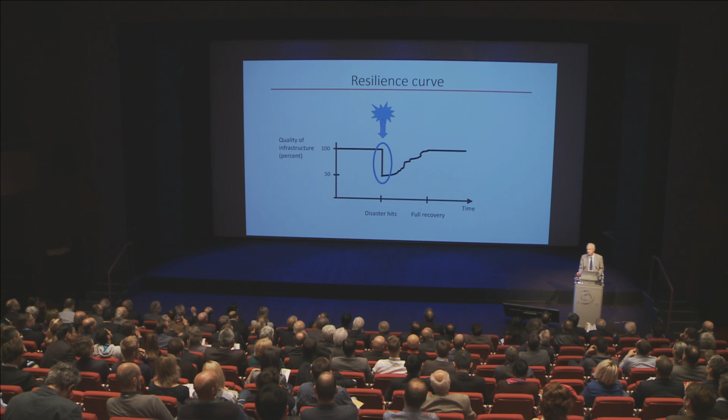If the structures are not resistant, the drop is very large and the recovery is very costly and takes a very long time. An extreme example is Haiti. As you know, there was an earthquake in 2010 with catastrophic consequences. The magnitude was not so large, it was only 7.

But the consequences—death, wounded, homeless—were catastrophic. The problem is this was the most destructive earthquake that any country has experienced in terms of the number of fatalities relative to its population. The reason for this was inadequate construction practice due to poverty, lack of professionals in the construction industry, and no seismic code.

Another example, on the other end, is a developed country, Chile. In the same year, the magnitude was much stronger. Magnitude is a logarithmic scale, and this earthquake was almost 1,000 times as strong regarding energy. In spite of this energy, the number of deaths was relatively low compared to the magnitude, but the damage was still extensive. Here we experienced very good behavior of engineered structures.

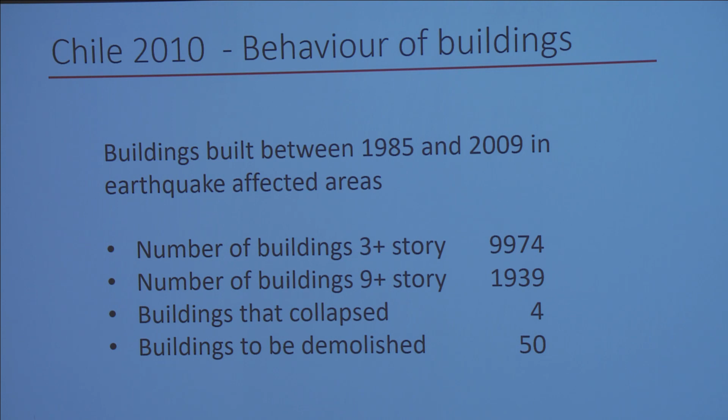Some data from taller buildings built in the last 20 years before the earthquake: only 4 buildings collapsed and 50 were to be demolished. This experience can be followed also after other earthquakes.

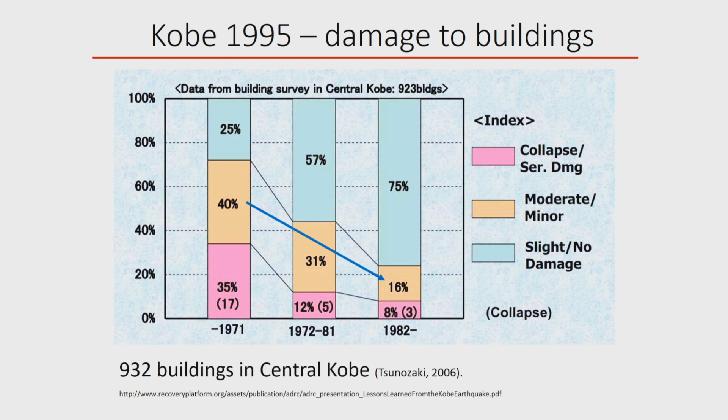The same trend can be observed after the Kobe earthquake. Again, damage to buildings was decreasing with increasing year of construction. This period of construction corresponds to different Japanese codes. So what we can see is that modern seismic codes are able to prevent, more or less, collapses of buildings.

One example from the Chile earthquake: in the most hit area, the city of Concepcion, we found a parking garage without a single crack. But unfortunately, in the same city, there was one of these 4 buildings which completely collapsed due to some problems in design.

This is the building Alto Rio before the earthquake. It was built just 2 years before the earthquake. It was an apartment building, and this is after the earthquake. Still, it's difficult to believe, but 79 people survived this collapse.

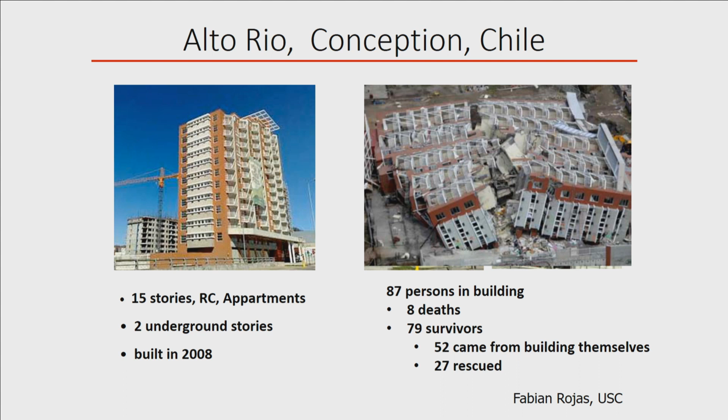So what we can say for new buildings is that modern codes provide seismic resistance if they are implemented in design and construction. So what is the potential problem? Review of design and control of construction. Earthquake-resistant design is not completely trivial, and some skills are necessary. Without review, things like what we showed before can happen.

I would like to emphasize something not very well known to the general public: that the seismic code is mainly about saving lives, not buildings. For example, the aims of the European standard for earthquake-resistant structures, Eurocode 8, has 3 aims: human lives are protected, damage is limited, and structures important for civil protection remain operational. Please note, damage is limited, not damage is prevented. This is because of economic reasons.

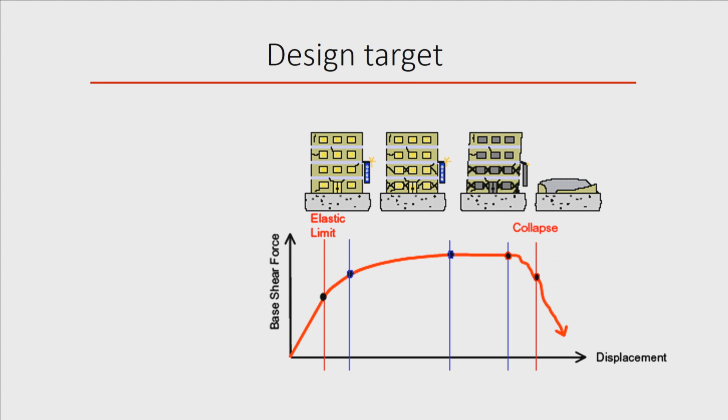I will try to explain this by showing a load-deformation diagram. In a usual situation, with vertical loads and small wind load, we are in this region, the elastic region, meaning no damage. But in the case of an earthquake, we design for rare earthquakes with about a 500 year return period. The probability of this event is 10% in 50 years, so a relatively low probability. So how we design is for life safety, not for preventing damage, for economic reasons, because earthquake-resistant design costs something.

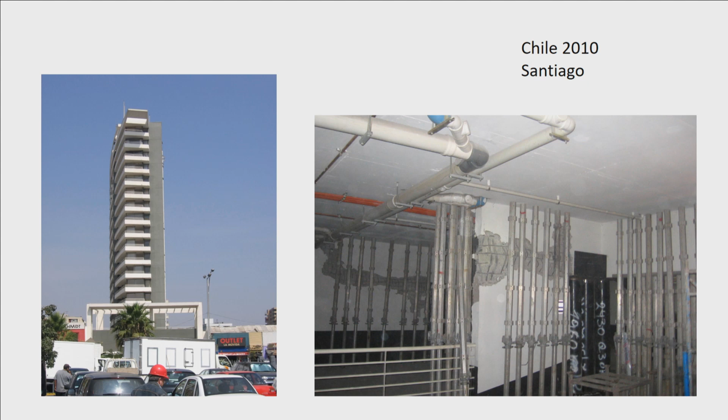To demonstrate this, I will show a building from Chile, from the same earthquake, in Santiago. From outside, it looks nice, but if we went to the basement, it was quite heavily damaged. The building was evacuated, and of course the owners and tenants were not very happy.

Because of this, there is a tendency in most developed countries, like New Zealand, which had a very bad experience with the Christchurch earthquakes some years ago, to decrease the damage, to change the design from life safety to less damage. But of course this costs money and will take time, and not many countries can afford this.

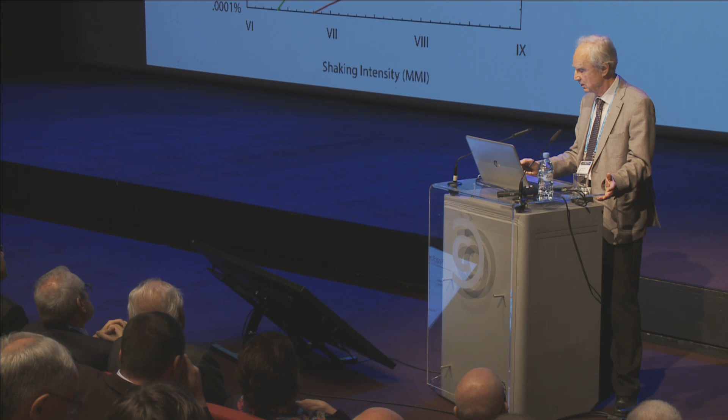A few words about Ljubljana, the city where we are today, my hometown. In Ljubljana, I would say a moderate earthquake, magnitude 6, was in 1895. Ljubljana is not a big city, and at that time was even much smaller. But 10% of buildings were destroyed and removed. At that time we lived in the Austro-Hungarian monarchy, and the next year a building order was issued which required some measures for unreinforced masonry buildings.

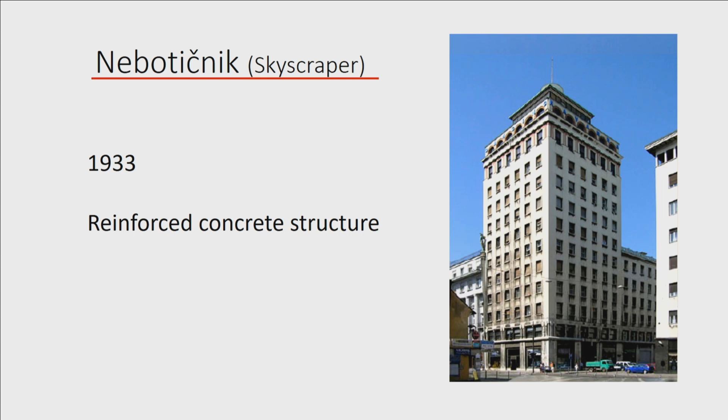People in Ljubljana still remember that earthquake, and when they built this building in the center of Ljubljana 40 years later, we called it Nebotičnik, which means skyscraper. At that time it was the tallest building in the whole region. It was a reinforced concrete structure, and they put a lot of emphasis on earthquake resistance, according to the knowledge available at the time. It's interesting that the designers used seismic isolation.

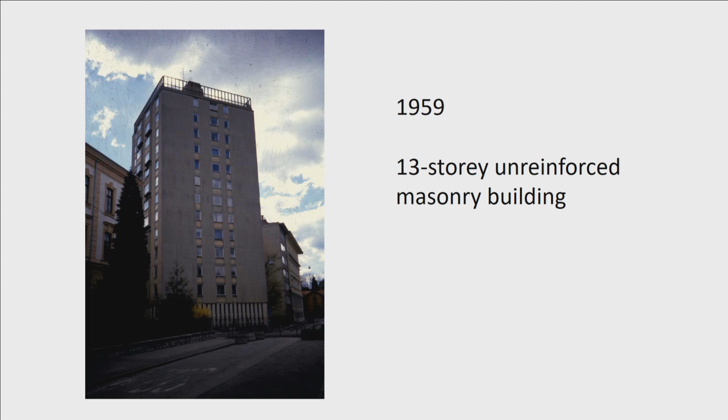But then, unfortunately, after the Second World War, there was a time of poor quality, quick construction, and no seismic codes. Some buildings like that were built in Ljubljana. This one was built in '59, a 13-story unreinforced masonry building. You can see, when the facade was removed, I took these pictures, this is unreinforced masonry. According to today's standard, it could be maybe 2 or 3 stories maximum, not 13.

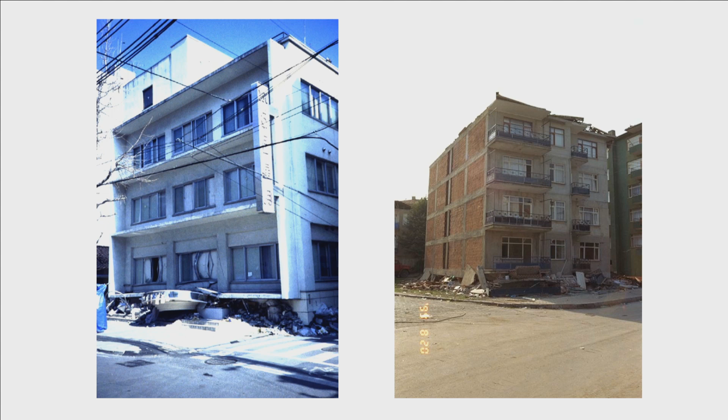Soft-story buildings are built because of architectural requirements. I put here only 2 of them, one in Japan and the other in Turkey, where the first story used to be. There are thousands of buildings like that. So this is enemy number 1.

Actually, this happened to be my building where I live. Very soon after this retrofit, a moderate earthquake happened in Slovenia, and journalists came, and we discussed different things. I mentioned that I retrofitted this building, and the next day there was an article in the daily newspaper: 'Potres bo, Fajfar hišo saniral,' meaning an earthquake will happen, Fajfar fixed the house. You know this joke: there will be a very cold winter, Indians are preparing firewood like crazy.

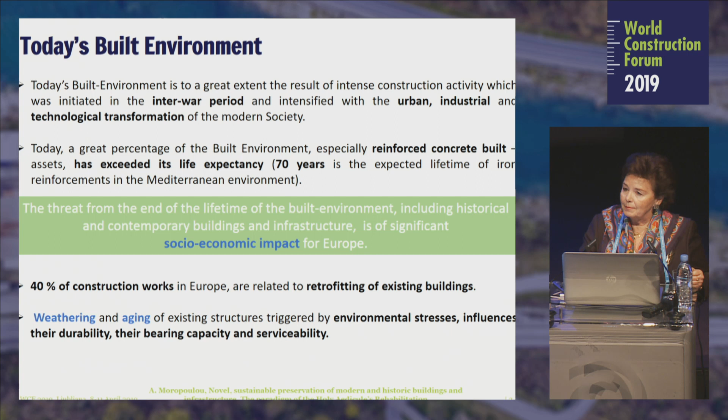At the National Technical University of Athens, we are dealing with the science and engineering of these efforts, and we know very well that research and innovation are the background on which we have to found this joint effort. In our case, our experience in monument preservation, concerning monument rehabilitation, I'm going to present the Holy Aedicule of the Tomb of Christ in Jerusalem. I might say that heritage is a lesson for all of us. Preserving heritage, we are talking with the monuments, and monuments are talking to us. And this is a lesson to learn concerning the preservation of our built environment and the resilience of our infrastructure.

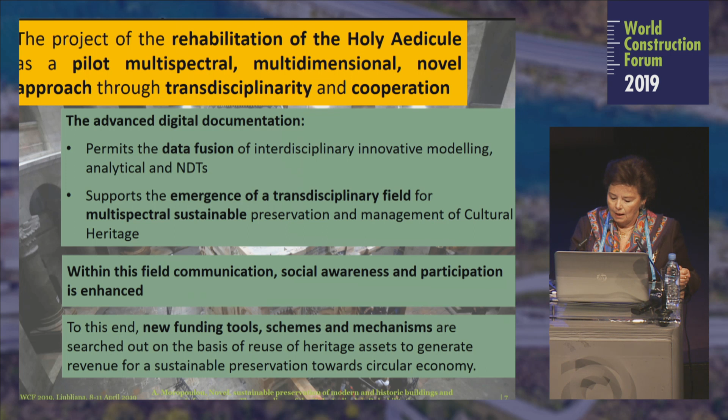As I've heard, and I was very pleased with this note from the UNESCO representative, it is a conscience of today that interdisciplinarity, merging capabilities and know-how, is the scientific basis in order to perform rehabilitation. Within this effort and the specific experience of the monument we dealt with, this unique monument is associated with communication, social awareness, and participation of humanity, which was enhanced and was necessary in this direction.

The Church of the Holy Sepulchre in Jerusalem is a church where the crucifixion and the resurrection places are brought together. The Holy Aedicule of the Tomb of Christ was a structure that from Constantine the Great passed through Byzantine,

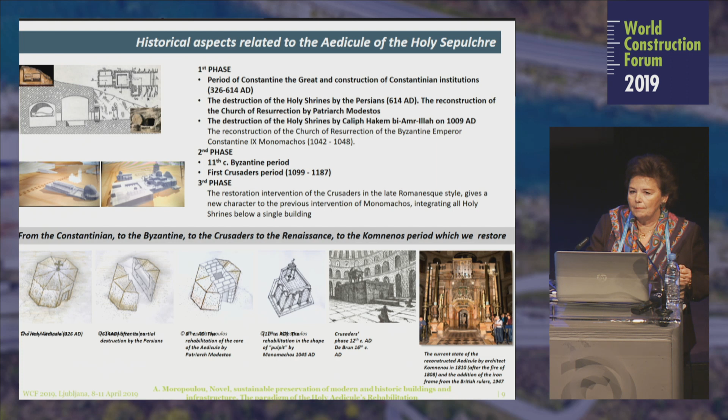the Crusaders period, the Renaissance period, and the last restoration before ours, the one of Komnenos at 1810, and the Ciborium, which is actually the specific structure to protect the Tomb of Christ, went from the octagonal structure to a columned structure, the Ciborium actually, to the mausoleum of the 19th century, the Baroque one, which we received absolutely deformed and sustained by the English mandate at 1947 with iron beams in the cage form you can preserve, and which we delivered one year later in the form you can see.

This project started with the invitation by the Greek Orthodox Patriarch Theophilos III, and this was the reason that on March 15 this venture started, because for security reasons to the pilgrimage, the Israeli authorities closed the Tomb of Christ to the people.

I had the honor to comprise an interdisciplinary working team: Professor Korres, School of Architecture; Georgopoulos, School of Surveying Engineering; Spyrakos and later Mouzakis from Civil Engineering; and me from Chemical Engineering, Material Science and Engineering for the protection of monuments, leading this team. The methodology of the research concerning documentation, diagnosis, and the proposals for the intervention were integrated concerning geometry, architecture, historic materials and structures, and of course, all this open to the dialogue with the three Christian communities.

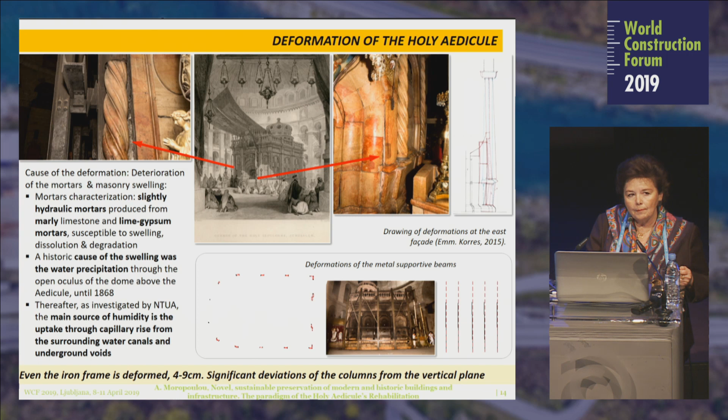The deformation of the Holy Aedicule was really a great problem, because they thought it was due to the rainfalls for decades after the Komnenos restoration from the open oculus of the dome of the rotunda of the Holy Sepulchre Church. As we later discovered, it was due to the rising damp from the underground area as well. But the deformation was clear, and the iron beams were not capable to negate it anymore.

Under these circumstances, and with the historical consent of the three Christian communities, the Greek Orthodox Patriarchate, the custody of the Franciscan Order of the Holy Land, and the Armenian Patriarchate, we undertook the responsibility upon our study to perform this work 200 years after another consent upon which Komnenos had restored the Holy Aedicule.

The interdisciplinary team performed the restoration, rehabilitation work on the basis of executive responsibility that I personally had, and supported this responsibility with scientific support to decision-making and continuous monitoring throughout the works.

Of course, scientific coordination of such a type of work had really to address great challenges. Among others, the continuous pilgrimage and religious functions. They didn't cease, but only for the 60 hours that we opened the Tomb of Christ, to preserve and highlight the values of a unique monument, and this within a limited time frame from Easter to Easter and less, because funding was not ensured.

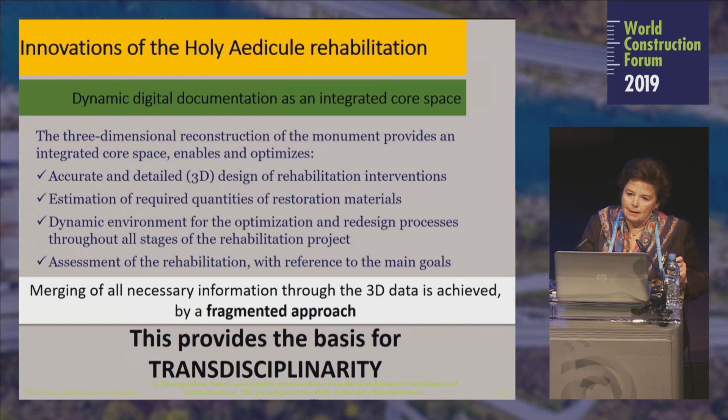Within the 3D digital environment, we were capable of performing continuous monitoring with non-destructive techniques to assess and evaluate our interventions in a way that we could optimize our redesign, if necessary, within real time on the scale of the monument.

This innovative inspection of the non-visible layers of the edicule was really a major tool for the rehabilitation. You might see how the ground-penetrating radar permitted us to estimate where the holy rock is, where the masonry of the various periods was extending, and to design the necessary interventions in an accurate way to estimate materials at the 3D level of

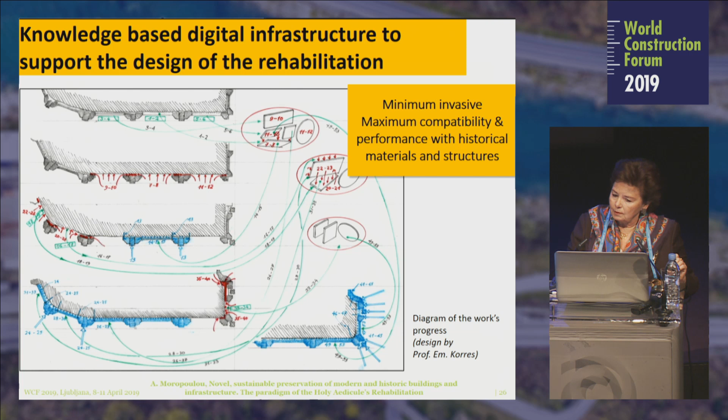model we were working. And the geometric documentation, the materials characterization, permit us, along with the architectural documentation, to perform the structural assessment by the finite element models that were realistic ones and dynamic ones, in a way that we would be able to select materials and structures for structural interventions in the time limit we had, of course, with a project planning that was very accurate and very strict. Compatible and performing materials were ensured by this integrated study, and that's a first step for sustainability.

I remember 30 years ago presenting in the Euro Parliament that if we have to sustain historic structures, we have to work with compatible materials, not with stronger materials. That was the time we started to abolish strong materials, cement or resins, from retrofitting historic structures. So here we ensure breathability, thermohydric behavior, we do not induce anisotropy, we have adequate mechanical behavior, and we do not introduce soluble salts, but mainly we go to homogeneity, a homogeneous structural system.

The iterative process of the main stages of rehabilitation started with removing the slabs of the edicule, retrofitting the inside masonry, and removing the degraded mortars, unifying the structural system by grouting, injecting compatible grouts, resetting the columns, sustaining with titanium bolts and anchors the systems to be stuck together, assessing and evaluating the reset to verticality and the performance of the structure according to its structural integrity, in order to remove the iron beams and the cage that was keeping the edicule intact, cleaning, protecting, revealing the values, and delivering the edicule.

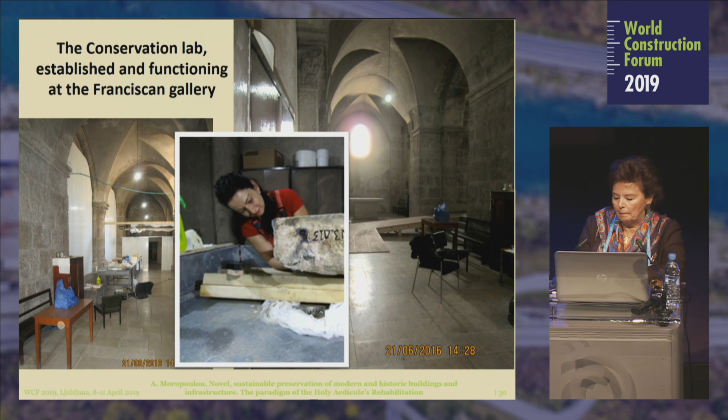For this reason, we organized upon the Franciscan Gallery the conservation laboratory where the numbered stones were removed, brought, and conserved. We organized, beyond the Tomb of Christ, an interdisciplinary laboratory in order to monitor all the phases of the works. The teams were working day and night, during the night in the Holy Aedicule so that pilgrimage and functions would not be ceased, and during the day at the Latin Gallery. The scientific team was uniting these two terms of the 24 hours, working continuously in Jerusalem and Athens.

The implementation methodology is actually an innovative one, from the point of view that this construction site was continuously open to the pilgrimage, and that the funding was crowdsourced. We started with zero. We initiated the work with the World Monuments Fund and Mica Ertegun as a benefactor at a third of the cost, 3.5 million euros, with transparency, uploading to the site of the Greek Orthodox Patriarchate all the costs.

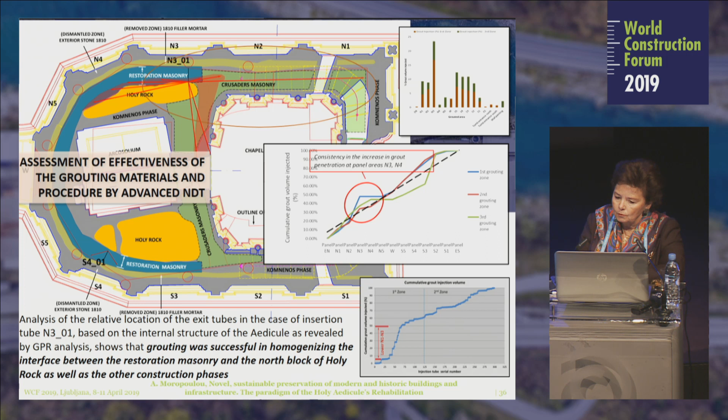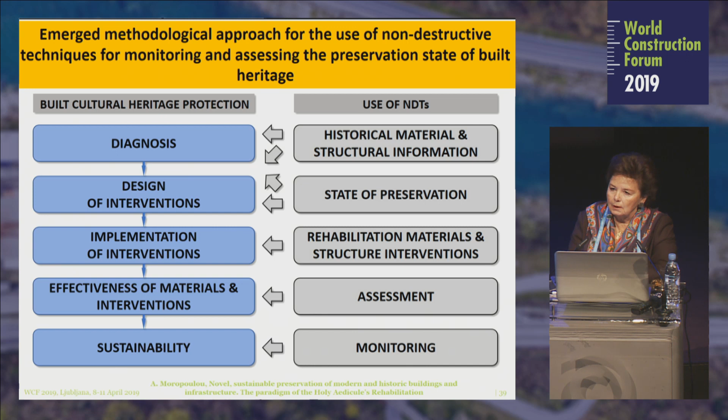The process of the works was facilitated by decision-making made on site upon the indications. For instance, the colors of the infrared thermography were indicating where we had voids to continue with grouting, or the ground-penetrating radar permitted us to assess that we had indeed consolidated the structures. That means the innovation of non-destructive testing permitted, on all phases, documentation, diagnosis, monitoring, assessment, and implementation, to perform the whole intervention upon the set criteria.

The most important moment of this effort were the 60 hours when we opened the Tomb of Christ during grouting, in order to protect it from irreversible intervention. That was a unique moment because after 2 or 5 centuries, according to historic sources, the Tomb of Christ was opened at a period when we had at hand the high technology to study it and reveal its secrets.

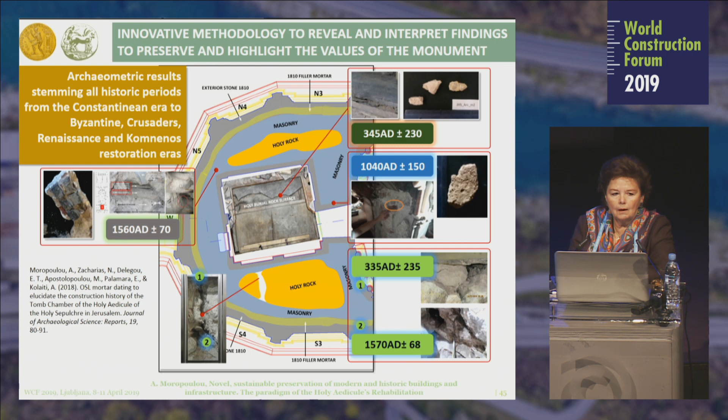That means the historic continuity of this unique monument was in front of our eyes, and it was ensured definitely by high-tech. Revealing the holy rock, the archetype material of the burial monument through opening a window was the first opportunity since centuries.

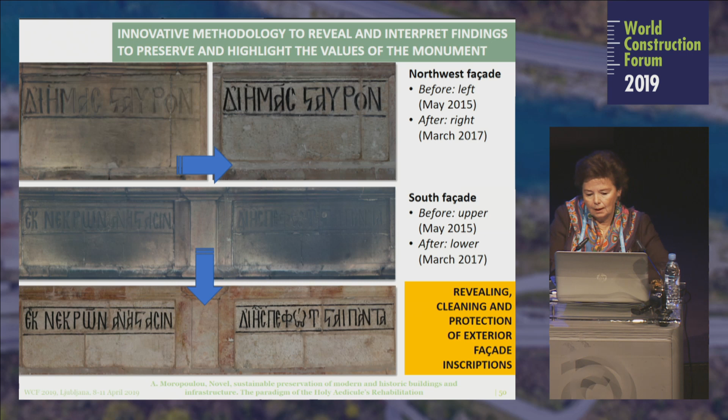That pilgrims would see the holy rock, and revealing the frescoes was bringing the myrrh-bearers back to the burial monument, or restoring the dome, the timber structure, and revealing the moon, the sun, the rainbow, or the inscriptions, which were the martyrs of resurrection, or the fingerprint of Komnenos in his last restoration two centuries ago, the cross of Komnenos, writing 15 October 1809.

Were revealing the values and the history of the monument as the cleaning interventions and the protection interventions, which enabled us at the end, in the digital infrastructure we constructed, to study the architectural evolution of the monument during the centuries.

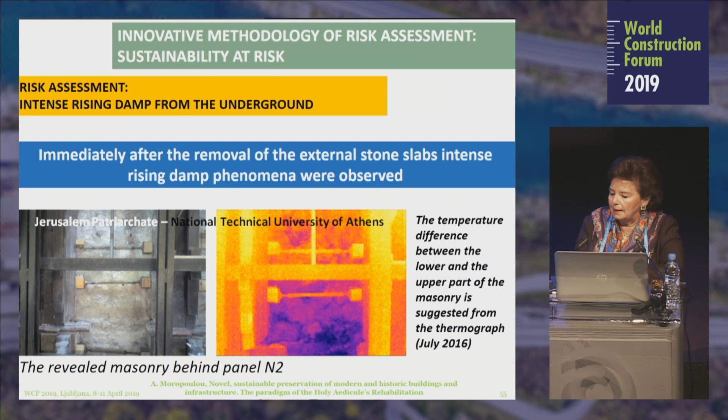But concerning sustainability, a window is open to the future. The risk assessment shows that the rising damp of the underground area is threatening this unique monument still. That was the reason that by delivering the monument in March 2017, we delivered the study to reveal the underground problem, which we could not do before. We did it, we studied while we were working.

Here, through robots, ground-penetrating radar, electrical resistivity survey, electromagnetic probe systems, we revealed all the channels, tunnels, cisterns, all the places where the rainwater from the Christian Road ten meters above was falling, and the sewage system of all the Holy Sepulchre was disposed underneath the Holy Rock.

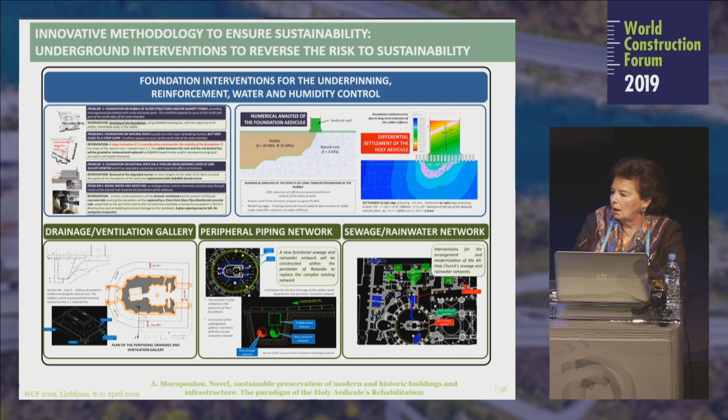We, of course, geometrically documented this, and we found all the archaeological important structures from Adrianos or from Constantine the Great, and we studied a drainage and ventilation gallery which would underpin the rotunda area, the general area, with a peripheral piping network for sewage and rainwater disposal in order to negate the differential settlement of the Holy Rock, which would be a threat and a risk.

A multimodal sensoring was induced before delivering the Holy Aedicule for thermohydric behavior, for seismic monitoring, and for verticality, for displacement from verticality. This work has the names of all the people. It's a collective effort that worked for it on all levels.

And at the completion of the work, the ceremony organized by the three Christian communities was of ecumenic level, with all the diplomatic and political representatives of the conflagrated Middle East there. That was the major challenge, that this monument and this work were not only uniting Christianity, they were uniting a world in crisis and in conflict.

And social accessibility, bringing the world to the tomb of Christ, which was an outcome of a communication strategy and of the opening of the Tomb of Christ, broadcasted by the National Geographic Society, brought more than two billion people to kneel virtually in front of the Tomb of Christ, and the media of the world to refer to it in a continuous way.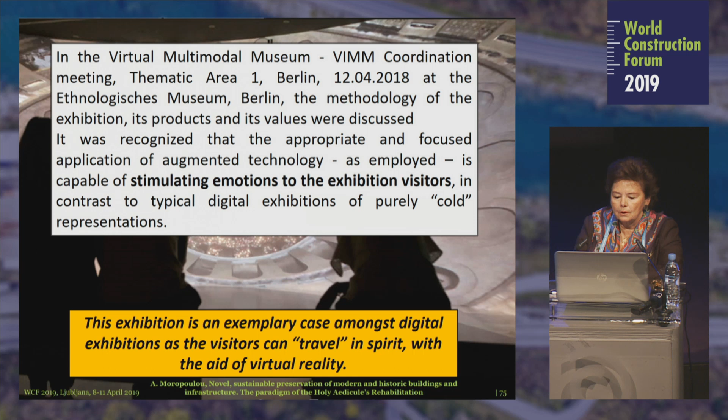And the virtual exhibition based on advanced digital techniques in Washington 2017 and in Athens, Greece 2018, which is traveling now in spirit, the world is going to Cyprus.

It has traveled by presenting the work to a European community as an exemplary restoration work in the year 2018, which was dedicated to cultural heritage, and now is opening horizons with Oxford, with Vatican, with all of the world for research, transdisciplinary research.

I could say that the Tomb of Christ, within the two years we studied and we worked there, became an open monument to research and education.

The status quo that did not permit other interventions, and UNESCO knows that very well, was open to ideas and the young people. Today, research is continuing, and we are performing the multi-layered data management and the fusion, of course, on the level of the platform we are developing to share this knowledge with the world.

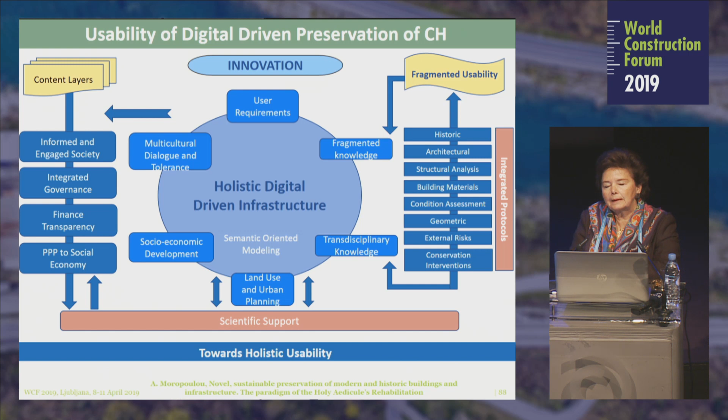We started with a fragmented digital implementation of merging all the various disciplines' data. Today, this becomes a holistic approach, and it brings us to a digital-driven preservation of cultural heritage.

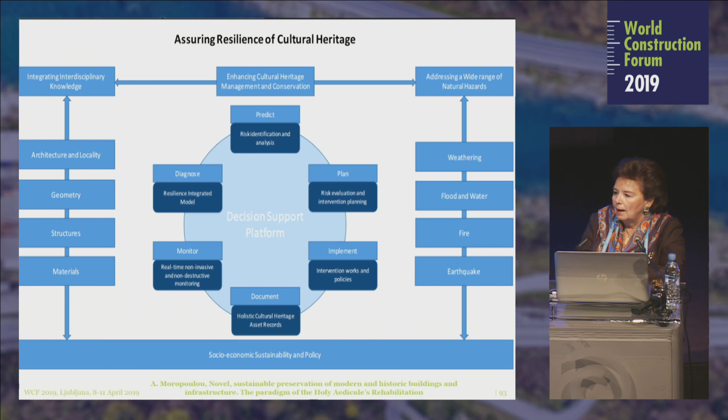Today's built environment is needing resilience modeling, and resilience modeling is not only a technical issue, it is a situation awareness issue. And we have to go to this end because we know now that towards a resilience integrated model, we have to include society. Assuring resilience means we have to ensure the feasibility of funding as well.

And the strategic impact has to take into consideration the United Nations Agenda for 2030 for Sustainable Development and the UNESCO requirements in order to keep in the list of international World Heritage Monuments, the monuments that are listed.

Finally, the challenge of interdisciplinarity and novelty is joining the challenge of inclusive growth. And the cities of our world, I'm speaking of my city, the medieval city of Rhodos, need an integrated approach, and this is the future. The research evolution is bringing us to circular economy, to preserve cultural heritage through its reuse, bridging private-public partnerships with social economy. Thank you very much.

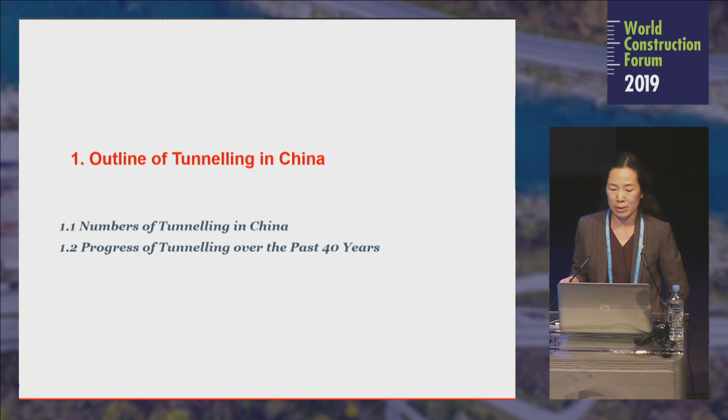So regarding the tunneling in China over the past 40 years, I would like to share you the numbers and the progress. I think maybe everybody knows China's 40 years of reform and opening up to the outside world has brought huge changes to this country since 1978, including China's booming economy, huge investment in infrastructure, including a dramatic increase in Chinese people's income, and of course, including dramatic developments in tunneling. That's what I'm going to talk about.

So here you can see some numbers by the end of last year. China has built around 36,000 kilometers of transit tunnels, including railway, highway, and metro, but this doesn't include tunnels for other purposes, like water transfer, utilities, and other purposes. And at the same time, around 20,000 kilometers of tunnels under construction, and another 20,000 kilometers of tunnels to be built in the near future.

So here, I would like to share with you the slide. This slide shows the numbers over the past 40 years. So you can see most of the existing tunnels were built over the past 40 years, especially in the past 20 years.

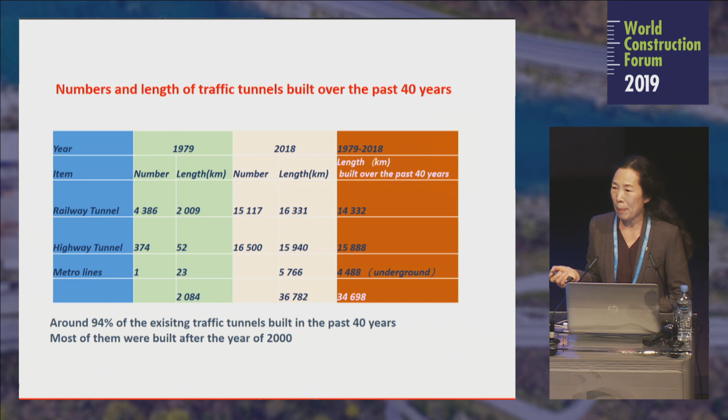It's quite challenging for me to summarize the progress of tunneling over the past 40 years because a lot of things happened, but I would like to give you some keywords. So keyword number one is about amount. A huge amount of tunnels have been built, around 45,000 kilometers for transit tunnels and other purpose tunnels. Especially in the past 5 years, a lot of tunnels have been put into operation, including railway, highway, and metro.

And keyword number two is about innovations. A lot of innovations have been made on the investigation, design, construction, and manufacture. Because of the time limit, I cannot go into much detail, but keyword number three is about challenges. Lots of challenging projects had to be built, including long, deep, large, high, and very complex tunnels.

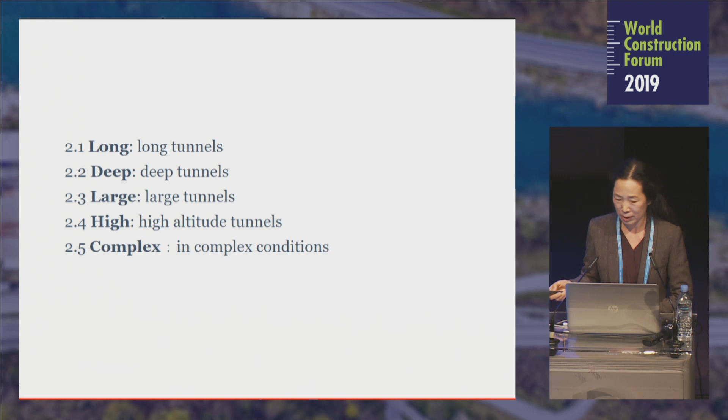So I'd like to share with you the challenges and achievements over the past 40 years. A lot of long tunnels, deep tunnels, large tunnels, high tunnels have been built. Regarding the long tunnels, this is the current longest tunnels in China. So the longest railway, longest highway, and the longest water transfer tunnels. I think the longest one in the world at the moment could be 283 kilometers long tunnel, for water transfer. This is a single tunnel, not many tunnels together, only a single tunnel.

It's quite long. I think for the challenges building these long tunnels, including uncertainty of geology and the long construction time because the tunnel is so long, as well as disaster prevention during operation. So I will share how we deal with these challenges. First one, we use geology prediction during tunneling because it's quite challenging to know exactly the geology before excavation. So it's very important, and now it's a compulsory procedure to do geology prediction during tunneling.

For the conventional method, that means drill and blast, it's quite easy because you can do it from the excavation face, but during tunneling by TBM, by machine, it's quite challenging because you cannot see the excavation face. So in this case, we need a special geology prediction system. We developed two different systems. One is we call it the induced polarization method, and we have sensors installed in the cutter head and also in the backup system, so we can detect the geology ahead of the TBM automatically.

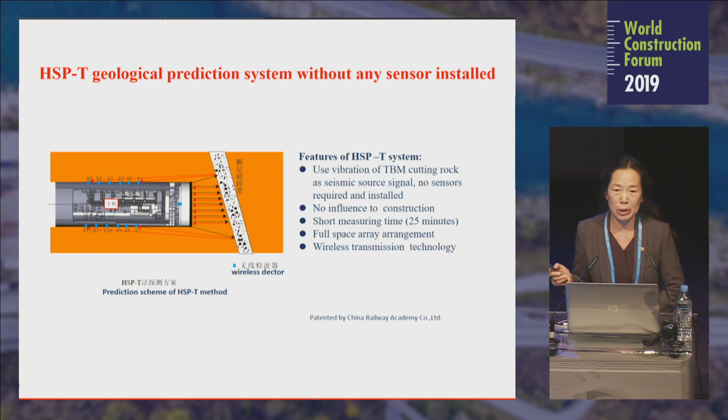Another system uses no sensors installed in the TBM, because some TBM manufacturers are not happy to have extra sensors installed. So this system works without any sensors in the cutter head. Instead, we use the vibration from the TBM cutting rock as a signal, and then we can detect the geology ahead. Both systems have been used quite a lot in different projects in China.

The other solution is about rapid construction. Actually there's no single solution for different long tunnels, but I'd like to share two cases. One is the Wushaolin tunnel, 20 kilometers long, with 2 parallel tubes.

This tunnel was the bottleneck of a very busy railway, so the earlier operation, the better. We used 13 different inclined shafts to speed up construction time, shortening it from 5 years to 2.5 years. After 2.5 years, these 20 kilometers of tunnel were already finished and put into operation, due to using more adits.

Another case is the Dahuofang water transfer tunnel, 85 kilometers long. The geology here is very poor, very fractured, with a lot of groundwater, but quite shallow in this part. In the rest of the tunnel, the rock is good but very deep, making it difficult to use more adits or more pilots. As a result, we used drill and blast conventional method for this part with more inclined shafts.

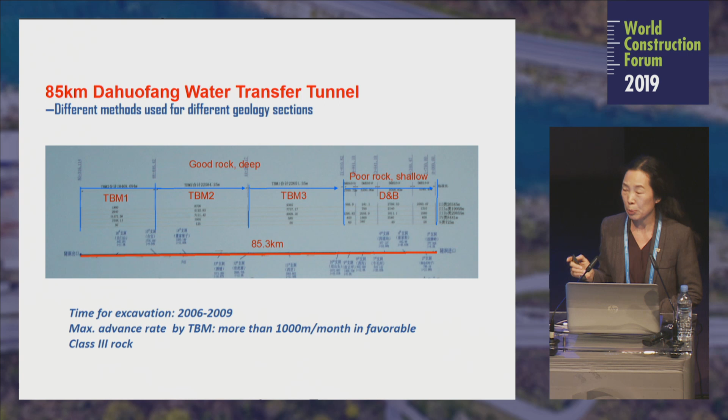Regarding deep tunnels, many have been built. I think the major challenges for deep tunnels include high ground stress, heavy water inflow, and geothermal problems. I will share two cases.

This is the Jinping Stage 2 hydropower station. Many of you already know this project. It was very challenging, with 7 very deep and very long tunnels, the maximum depth being 2.5 kilometers. During construction, very serious rock burst as well as water inflows with very high water pressure happened. The pressure was around 10 megapascals, meaning the groundwater was more than 1,000 meters deep. It was very challenging.

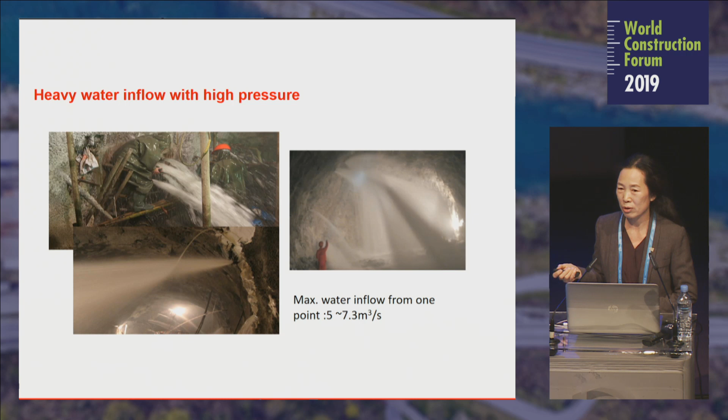You can see from the picture, sometimes it's very difficult to deal with these water inflows with such high pressure. Sometimes the water inflow is so strong you can't stop it with a single solution, so we drilled more boreholes to release the pressure. Because of the faults, this was the major water inflow point, so more boreholes released the pressure, and then we could stop it by grouting one by one, finally stopping the water inflow. This follows more or less the same philosophy.

Of course, for deep tunnels, rock burst is quite common. For this project, we had around 11 kilometers of tunnel with this kind of problem. We repeatedly maintained the surrounding rock and used blasting for stress release, as well as strengthened support to accommodate deformation and maintain the structure. Finally, that project was completed and put into operation in 2014.

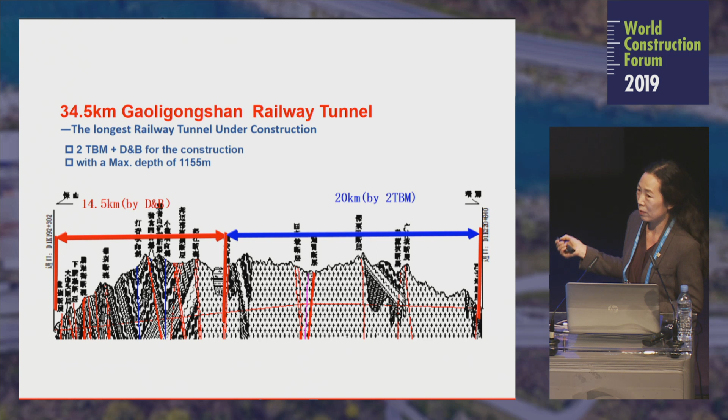Another deep tunnel case is Gaoligongshan, currently under construction. You can see here, this part has quite good geology, while this part is quite challenging and complicated. So we used 2 TBMs for this part and the conventional method for the other.

The major challenges for this tunnel are numerous. One of them is the geothermal problem. In this area there are a lot of hot springs - how hot can you imagine? It's nearly boiling water, more than 90 degrees, so you could use it for cooking without a problem. But for tunneling it's very challenging. Luckily, inside the tunnel the temperature was hot but not so hot, though it's still a big problem for tunneling.

We used ventilation and cooling during construction, and also grouting to stop the water, because the very hot groundwater comes from very deep. So we stopped it by grouting. We also considered the durability of the shotcrete and lining, since during construction, if the temperature is very hot, the quality of the concrete and shotcrete can be a problem, so we needed to sort that out. This tunnel is now under construction.

Regarding large tunnels, we use different methods to build them, including conventional method, TBM, immersed tube, etc. So I will share with you several interesting projects.

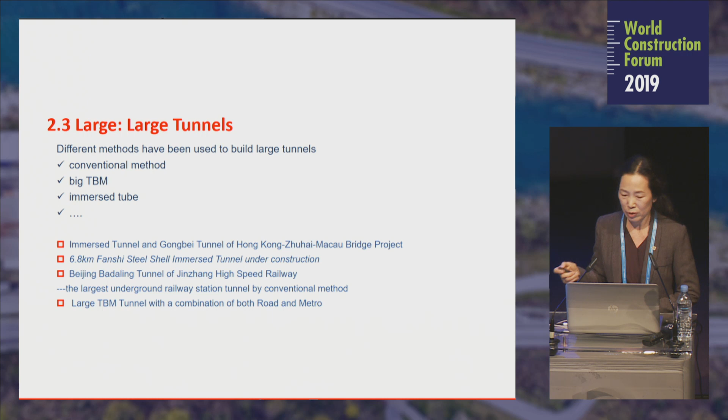This one is the Hong Kong-Zhuhai-Macau immersed tube. It's the very largest immersed tube at the moment, linking Hong Kong, Zhuhai, and Macau. There's a short video film I would like to share with you.

Connecting Hong Kong and Macau at the west, its total length is 55 kilometers. The island and tunnel engineering construction consists of 2 artificial islands with areas of 100,000 square meters each, and one 6.7 kilometer long immersed tunnel, which is so far the only deeply buried immersed tunnel, as well as the longest highway immersed tunnel in the world.

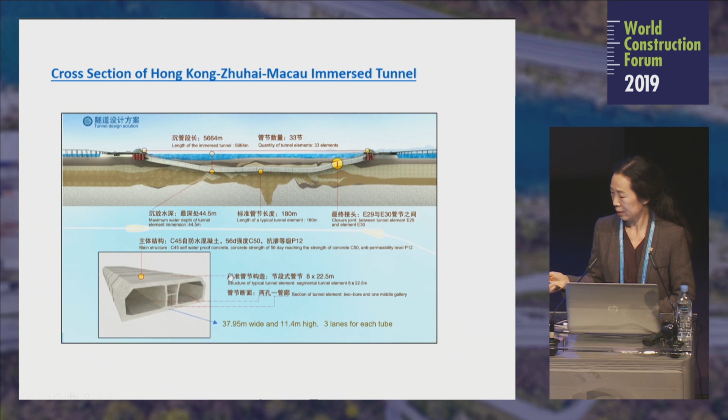Because the video is quite long, I just cut a very short part. This immersed tube is linking 2 artificial islands, around 6 kilometers long, and it's quite a big one - around 38 meters wide and 11.4 meters high. This one was already finished and opened to traffic last October, and this project was the major tunneling project of ITA last year.

At the same time, we have another similar project under construction - this is the Shenzhen-Zhongshan corridor, near Guangzhou. This is another corridor under construction, also a combination of bridges and immersed tube, with another artificial island. This one is even longer and bigger than the Hong Kong-Zhuhai-Macau immersed tube.

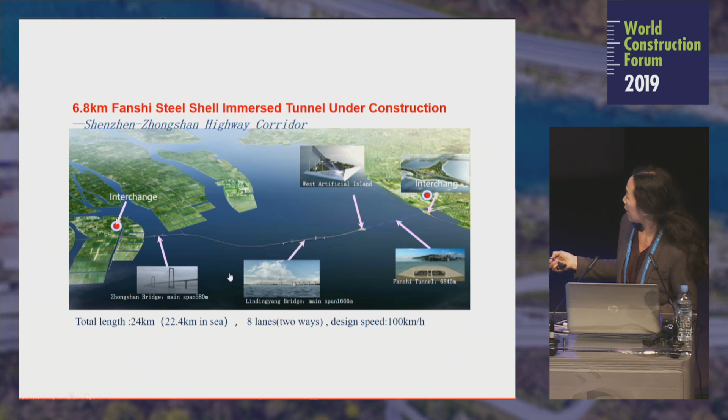It's a steel structure, not concrete. You can see it's even bigger - 46 meters wide, 9 meters bigger than Hong Kong-Zhuhai-Macau, with 4 lanes for each direction. It's under construction and it's also quite challenging.

We also use conventional methods to build large tunnels. Here you can see the Beijing-Zhangjiakou project, built for the high-speed railway especially for the 2022 Winter Olympic Games. There's a very long tunnel here, just under the famous Great Wall, around 12 kilometers long.

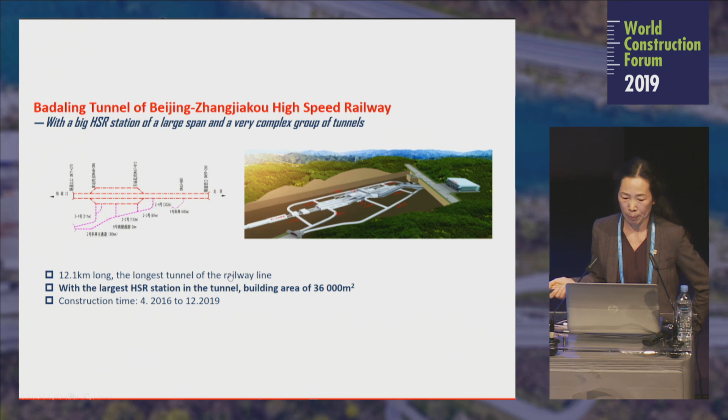In this very long tunnel, there's a very big underground station for a high-speed underground railway, under construction. It's very big, with a building area of about 36,000 square meters, and the construction time for this railway is 3.5 years.

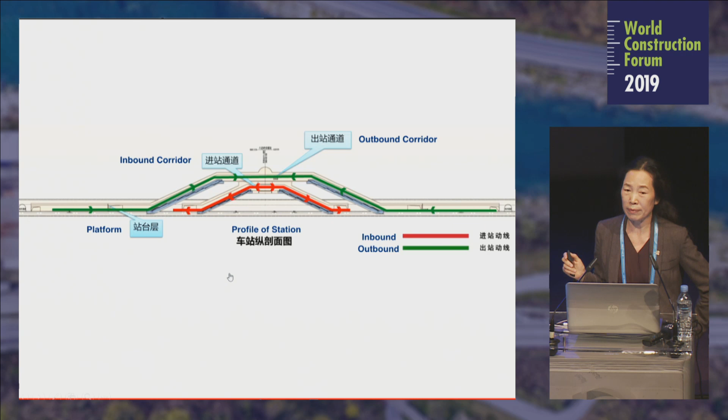We also use TBM to build large tunnels. This is the case under the Yangtze River - also 2 tubes, but a combination of road tunnel and metro tunnel. On top is 3 lanes for road, and underneath is for metro line number 7. This is in Wuhan, and this project already opened to traffic last October.

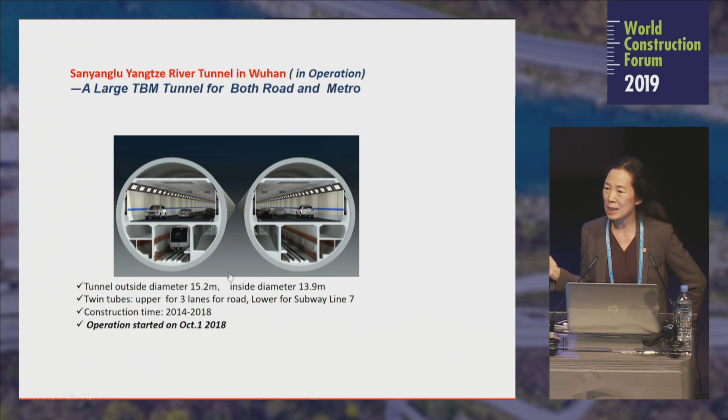At the same time, we have another similar project now under construction in Jinan city. For this kind of design, we need to optimize the use of space, because the bigger the tunnel, the more expensive it is. We use this space for smoke extraction for the road, and this for smoke extraction for the metro tubes - so we need to optimize the use of the cross-section.

Regarding tunnels at high altitudes, I will show you 2 projects - one for railway, one for highway. This is the Qinghai-Tibet railway, I think the longest and highest railway, because its length is 1,100 kilometers long, but 960 kilometers is at an altitude of about 4,000 meters, and the highest point is more than 5,000 meters.

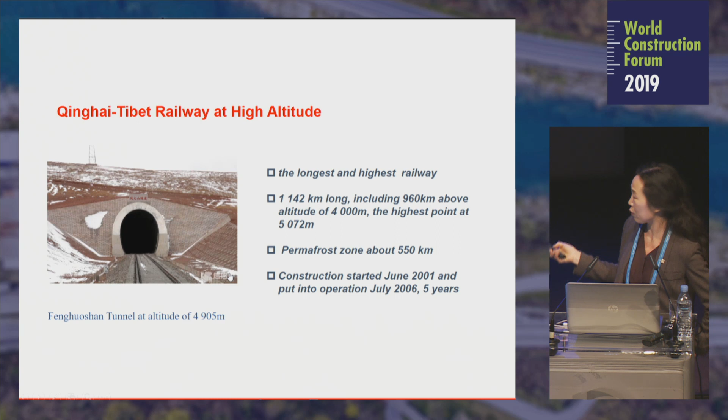There are a lot of challenges. This could be the highest railway tunnel, because the altitude is nearly 5,000 meters, and the construction time was only 5 years. Regarding tunneling at very high altitudes, I think the major problems include freezing and thawing, and also habitat problems.

At high altitudes, there's a lack of oxygen, so even the equipment is not so efficient. You have to use electrified equipment as much as possible, because for diesel power equipment, sometimes the efficiency isn't good enough. We also need to consider the health of the laborers due to lack of oxygen, so we use an oxygen generating station to supply enough oxygen.

It was very challenging. Another case is a highway tunnel. You can see the blue one was the old highway, and the red one is the new solution with a tunneling solution. It was so difficult, because the road was so dangerous, especially in winter time, with steep slopes.

But in summertime, there were debris flows and landslides, it was so difficult, and there were several accidents due to the very critical situation.

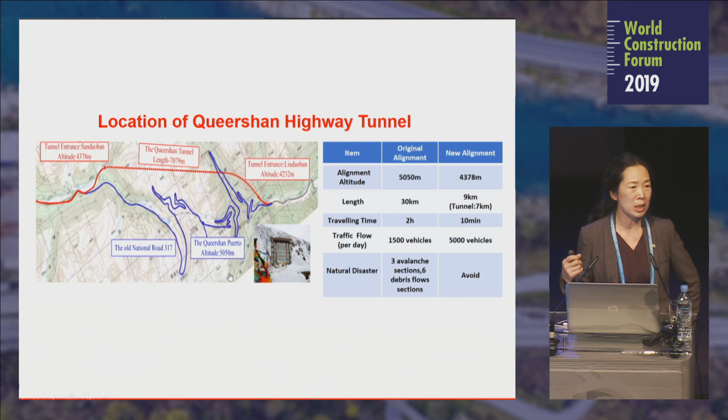But now it's very easy with the tunneling solution. Only 10 minutes for 9 kilometers, a very comfortable situation, and the altitude is reduced from 5,000 to 4,300. So I think tunneling improves people's life and also saves people's life.

I would like to share some complex tunnels, but I don't think we have time to go into detail. There's a lot of tunneling in complex geology, including karstic, thermal gas, squeezing, flowing sand, loess, etc.

We also built quite a lot of tunnels in challenging urban areas, including underground interchanges. We use a lot of interchanges, but usually they're bridge interchanges. We built several underground interchanges and other tunneling in very sensitive grounds and very sensitive buildings.

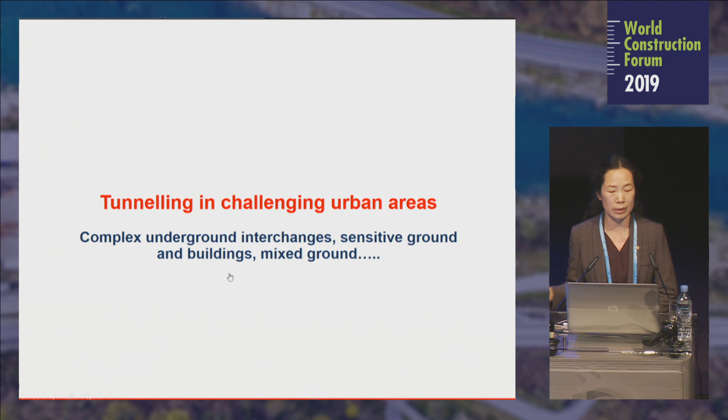Regarding future development, I would like to share two very challenging projects. One is the Sichuan-Tibet Railway, around 1,700 kilometers long. You can see the geology is very challenging, and 80% will be in tunnels.

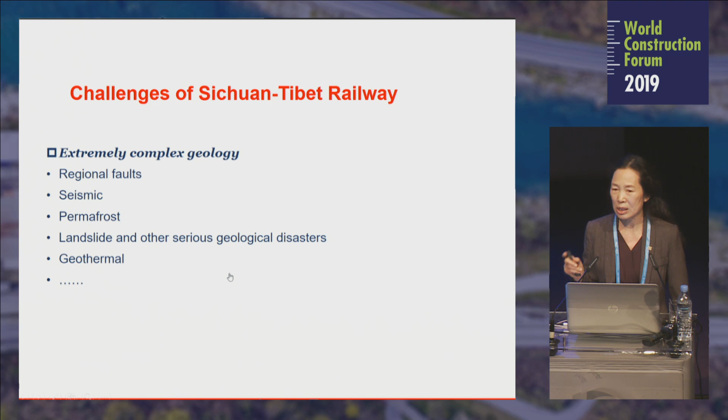The challenges for this project include very complicated geology, faults, seismic activity, permafrost, landslides, and other geological disasters. The weather conditions are also difficult because of the altitude. There will be a lot of long, deep, and high tunnels to be built. I'll show you some of the long tunnels - the longest one is 42 kilometers, plus several others. The total length of tunneling could be around 1,000 kilometers.

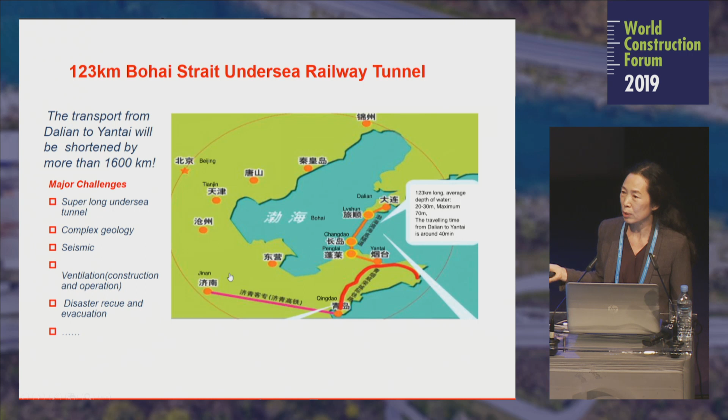Another project is the undersea tunnel linking Dalian and Yantai. It will be 123 kilometers of undersea tunnel, also very challenging because the geology here is complicated and it's a seismic area, and it's so long. We need to consider how to ventilate it and how to prevent disasters, etc. These two projects will be built in the future.

Finally, great achievements have been made in tunneling over the past 40 years in China. I think these achievements would not have been possible without knowledge sharing and experience sharing, and even encouraging successful projects internationally. The development of tunneling technology in China also contributes to our international tunneling industry.

Not only in China, but in other parts of the world, I think we have more challenging projects to come. So I think we, the International Tunneling Association and International Engineering Society, need to deal with these challenges with even longer, even deeper, even larger, even more complex tunneling projects together. Thank you, I would like to thank you for your attention.

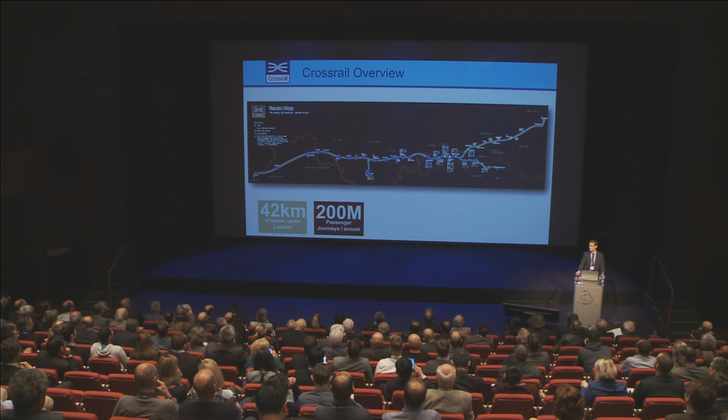This will eventually lead to 200 million more passenger journeys a year. These stations are huge when compared to existing London Underground stations, so we're often finding that a Crossrail station would span 2 existing London Underground stations.

There's going to be 24 trains per hour in the central section when it's finished, and it will increase London's transport capacity by 10%. In the design and construction, we've used 250,000 models, including 3D models. We've got 5 million documents kept in our document management system, 1 million assets and equipment across the project, 500 million GIS features, and GIS was a central part of our BIM strategy.

And the total cost is now over £17 billion. So these are just a few quick glimpses at construction. That's the canopy at Paddington.

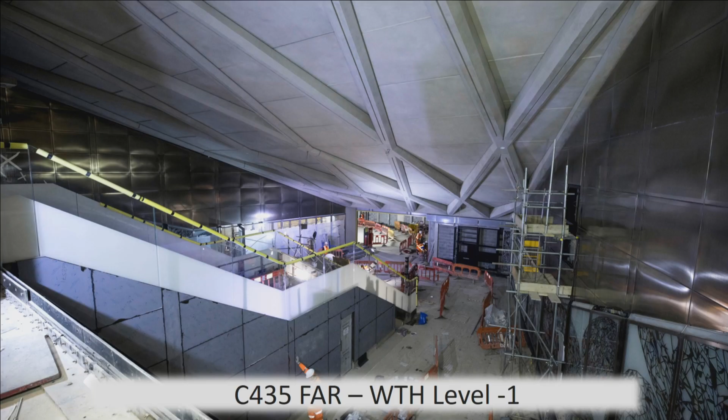The size of the stations resulted in huge pieces of equipment needed to be installed, and this was a very challenging thing to install in very congested construction environments.

Also, we had artwork across the Crossrail project. This was all privately funded, so over £2 million worth of privately funded artwork at many of the stations, if not all. And a whole new fleet of trains.

So these are state-of-the-art trains with new software on board that had to deal with several different signalling systems. Across Crossrail, you've got the central area, then east and west, and also the spur going down to Heathrow. Each of these has a different signalling system, and each of those signalling systems needs to be spoken to by the train. So these trains have been extremely challenging, and are an ongoing challenge for Crossrail.

So, project complexity. The bill went through Parliament back in 2005 when we were given the go-ahead to start Crossrail. The budget was fixed here at £15.9 billion. As construction started and as the design developed, this increased to 17.8, but then the government came in and had a review of that and dropped it to 14.8.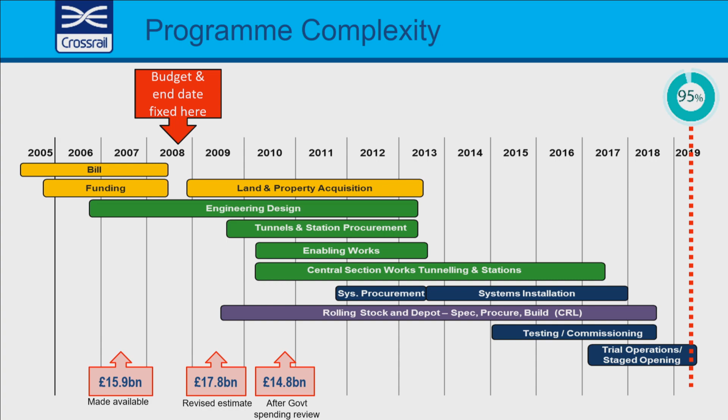As construction has continued, and due now to complications, you may have heard that we're now delayed delivering Crossrail, the price is looking like going back up to 17.6 billion.

Also, there's massive contractual complexity. Each of these contracts across Crossrail needs to be able to use the information that other contracts produce. So we needed to be absolutely sure of the reliability of the information that we were asking for and that was being delivered, so that each contract could use the information that other contracts were providing, and they could know where to get it and rely on that information.

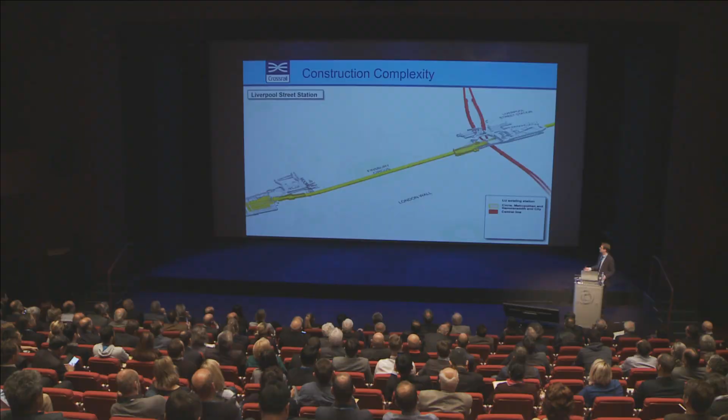So the construction complexity - this shows Liverpool Street Station. These are existing London Underground stations: the Circle Line, the Central Line and the Metropolitan Line. And then there's the Crossrail station in the middle of it. As you can see, Crossrail spans 2 existing London Underground stations, and this is in the heart of the business district in London, with huge skyscrapers, deep piles and a very challenging construction.

This also shows a small video showing the interface with those different utilities and existing infrastructure. You can see the existing line here, this is our TBM coming through here, and this is existing LU infrastructure.

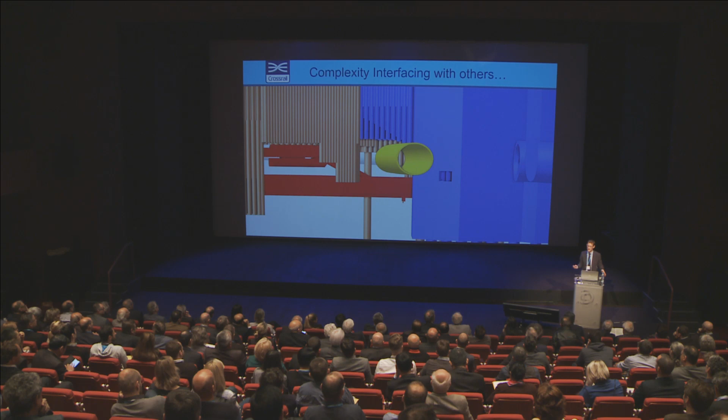These tunnels are 42 kilometres long, 21 kilometres each, so there's 2 tunnels. And the distance between the tunnels, the existing tunnels there and the piling there, was less than a metre each side. When you're dealing with that length, the accuracy of the data that you need to programme those TBMs was again very challenging.

So also the physical scale and complexity of the Crossrail project is replicated by the scale of our virtual world, and this is where we come into BIM. Not only do we have all the construction assets, the physical assets, we also have digital assets, and these are just as important. So we have various systems, various documents, drawings, relationships, and relationships is hugely important - can you go from one bit of information to another bit of information seamlessly?

So effectively, we were building two railways. This is Canary Wharf, which is built, and that's the digital replica.

Also, we had to think about who we were giving our data to. Not only did we need the data we were collecting to be reliable amongst our supply chain, but also we needed to think how we're going to deliver that data onto our stakeholders. So we've got Network Rail, RFL (Rail for London), London Underground, and London Underground at TCR. How are we going to pass over all the information we've collected about our assets so they can realistically use them in whatever asset management system they have?

And this was a lesson learned perhaps by Crossrail, in that next time we would probably hand over our entire asset management system rather than have our own. We used Eclipse, and then the end user putting those into things like Maximo, just to save cost at the end of the project.

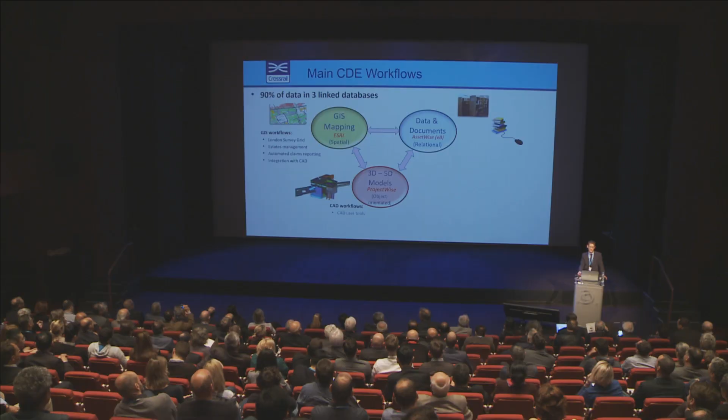So 90% of our data was in three linked databases. GIS mapping, which was hugely important to Crossrail, effectively a Google Maps of the whole Crossrail project. You could go into that map, you could go into a station such as Farringdon, you could go into a room in Farringdon, you could find the asset information associated with that room. That would then lead you to EB, which is where we kept all our documentation, our reports, contracts, health and safety documents, all the drawings that came out of our CAD.

And then we kept all of our CAD in ProjectWise and nowhere else. So anyone working on the Crossrail project needed to work within ProjectWise in real time, so that anyone changing a model and issuing that model and sharing it for others to see, people would see it instantly. And all these databases are linked, so that they have relationships between them, and you can go from a model in ProjectWise and instantly know where to find information about that in EB.

So this resulted in effectively our digital end state here. If we look at an asset breakdown, this is a facility, in this case a station, Farringdon Station. If we go further down to a primary functional unit, which is an escalator, that information will be held in the GIS, in 3D models, in as-built drawings, which are PDFs. You'll have health and safety records, maintenance concepts, test certificates, etc. If you break that down even further to handrails, stairs, or motors, each will have an operations and maintenance manual associated with it. So what we've created is you could start with the GIS, your Google map of Crossrail, and very quickly drill down into how to maintain a handrail on an escalator at Farringdon Station.

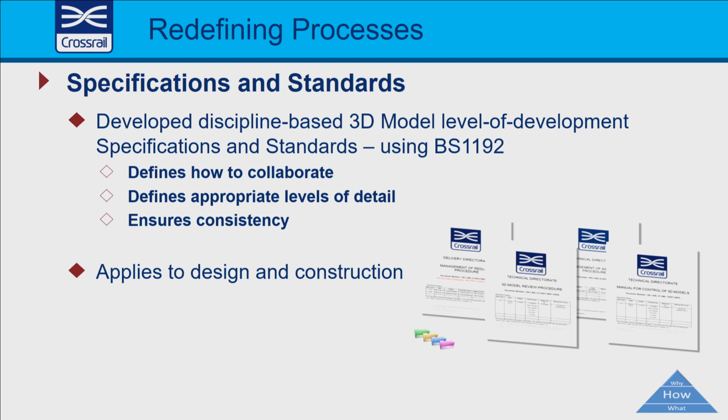And that's all about space management, using 3D models to coordinate. It was very important for us to be specific about the file format. So everyone working within ProjectWise, contractually, we made them work in a specific file format, specific versions of a specific file format, so that every person's 3D model would automatically fit within everyone else's 3D model, all geospatially correct.

And what we learnt as well is that we needed to insist on regular model updates. Some people would be working away on their model and might not share it for a year and a half, while others are working on old data. So to have that written into contracts, which is something we didn't do but we've learnt from, is to insist on regular model updates.

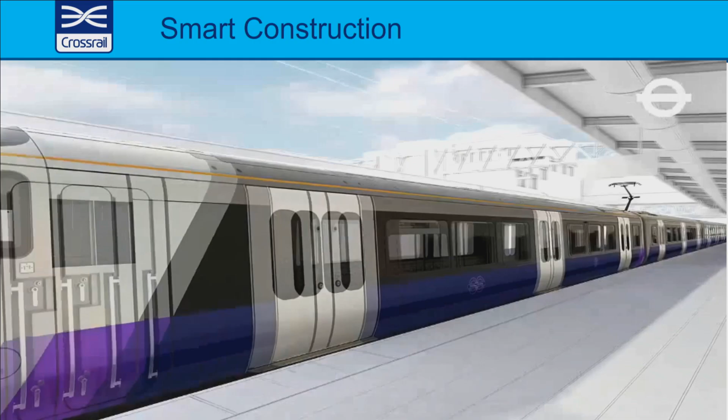And also smart construction. So here we have a train going through one of the tunnels. Obviously, lots of equipment needs to be installed in these tunnels - walkways, CMS, fire mains. A huge amount of manual work would be required to drill the holes necessary for all this equipment. So each of the tunnels was scanned. This scanned data was then fed into a digital format. All the locations of all the drilled holes were then inputted, and this machine rolled along and drilled the holes exactly where they needed to be, which made the job extremely efficient, accurate, and far quicker.

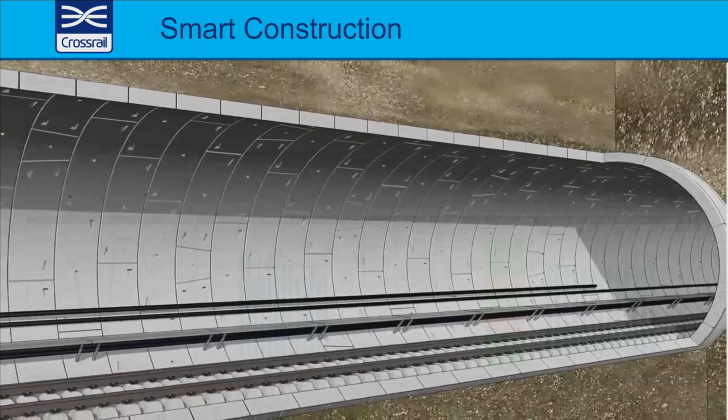We also insisted on project dashboards, which are often forgotten on projects, so that there is great visibility across the project of what other projects are doing, and also visibility up and down the supply chain. There would be weekly, monthly dashboards showing the state of construction across each project, and Crossrail itself produced these.

So using data for asset management, we formulated an asset information management plan, which again was instructed in contracts, which they had to follow contractually. This would define our overall approach to asset management, and it would list key supporting documents so that people knew what we expected an asset to be.

So for example, I could call this a glass, someone else could call it a container, someone could call it a cup. I could say it's half full, you might say it's half empty - but in Crossrail we had to tell people exactly what we expected an asset to be. So we would specify in our asset data dictionaries what each asset was, what type of attributes to collect against it, so that everyone was clear across contracts and across disciplines what assets we expected to collect. And again, this was written into our contract clauses.

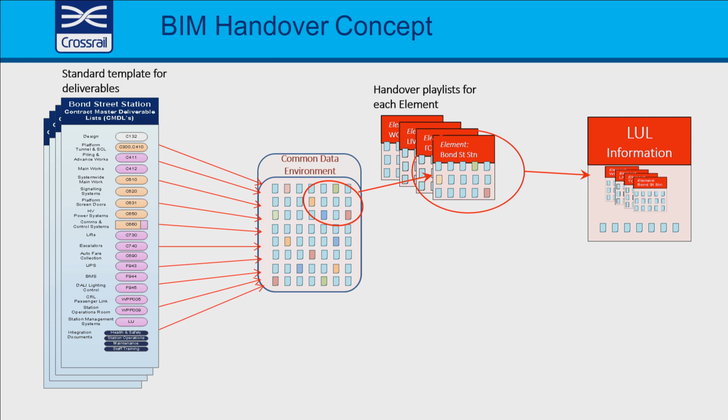We have different clients and stakeholders, each requiring different types of information. For instance, London Underground would require certain information that we'd take from our common data environment to hand over to them. RFL might require different information, which might overlap, but we can pick and choose from the common data environment because everything in there is consistent, and we're not having to go to various areas to find the information we need.

So, lessons that we learnt. Firstly, we learned that the best innovators in BIM were actually the best performers, which is very encouraging practically for the benefits of BIM. And we were finding contracts that were willing to engage with us and work towards a BIM solution actually performed better as a contract.

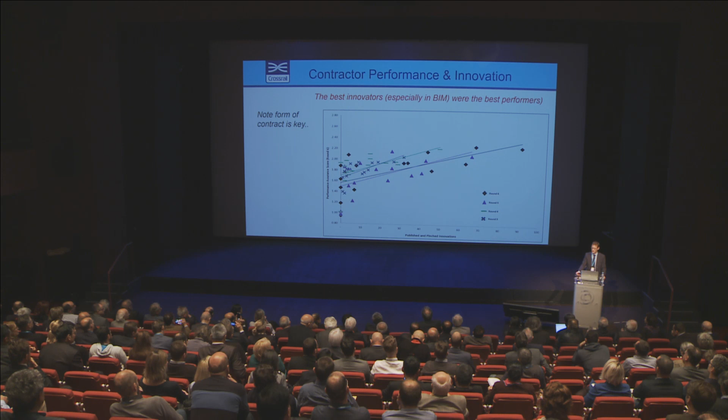In terms of our asset collection, we needed to define assets very clearly in the asset data dictionaries, because lack of consistency, we found out very early on, causes trouble. We've also found that contractors release asset data as late as they can. They're busy building the station, and collecting data about what they've built is not necessarily their priority.

For processes like maintenance and operation, it's not just about building the stations. These stations will be around for 100 years, and far more important is the data we hand over at the end of design and construction. Also, maintainers need some asset data early for training, especially on projects like this with new trains and new software. So next time, we'll create and agree an asset data dictionary even earlier.

You may have heard that Crossrail 2 is happening, going from north to south of London, and that's what they're doing—building a complex asset data dictionary early. We need to collect that asset data progressively, not wait till the very end and try to collect it. Collect it as early as possible. And as I mentioned earlier, we'd hand over our asset information systems in their entirety, not just the data, so that it was easily brought in by our clients.

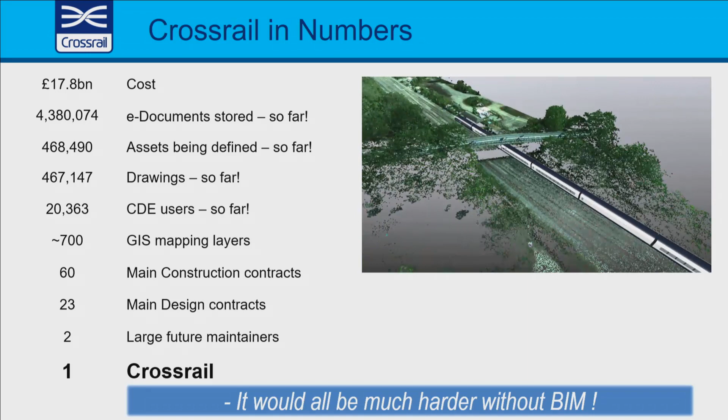It would have all been much harder without BIM. So the very last slide - I don't know whether any of you have heard of Ray Kurzweil, who works for Google as an engineer, and he has theories which he calls the singularity.

So in the construction industry, we need to be mindful of this and realize that technology is something we can embrace and something that can really change the lives of not only us who use it as engineers and designers, but also the people we're building for. So thank you very much.